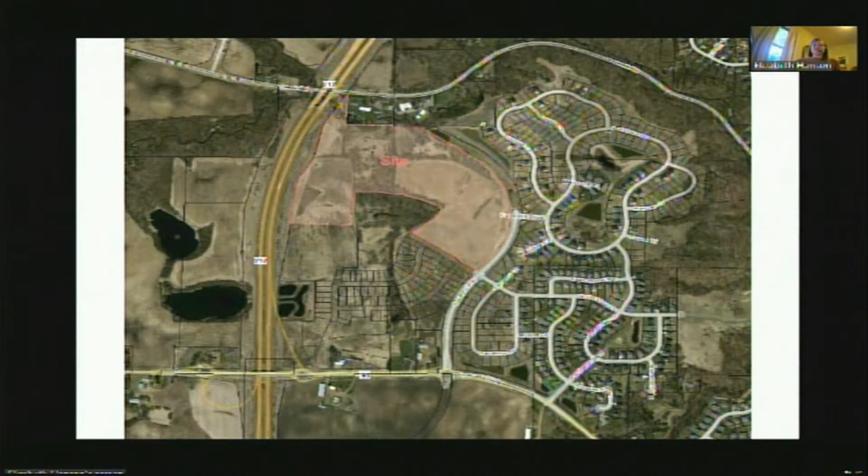In terms of background of this overall site, Harvest West, the area encompassed in blue just south of the area we're looking at tonight, was approved in March of 2018, and that encompassed roughly 125 lots. Since that time, two final plats were approved to plat out the entire area south of here. So everything south of this subject site is platted and ready for development, which includes detached single-family units, both the traditional single-family and their detached villa product by Robert Thomas Homes, also Traditions.

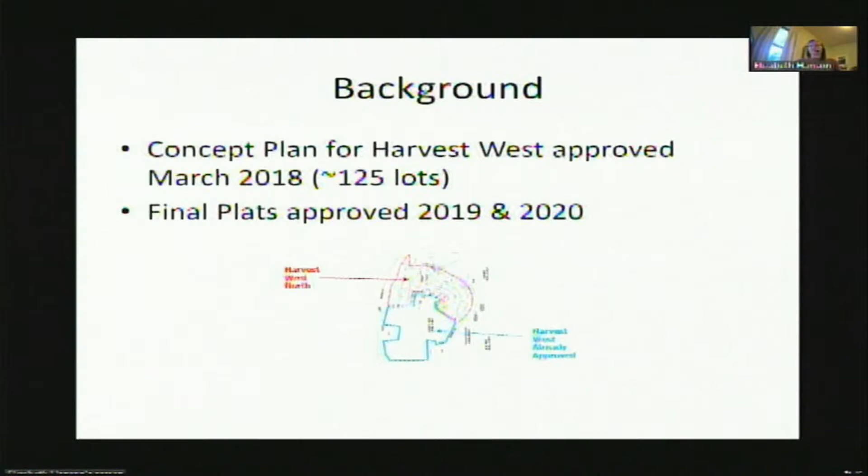Tonight we're looking at a concept plan approval for the north side of the Harvest West development. They held off on this portion to further work on some of the characteristics and conditions of this portion of the property. So they are coming back at the beginning of the process for concept plan approval, which would encompass 119 single-family lots. Of those, 85 will be for their detached single-family, traditional single-family that you see on the east side of Savanna Way, and 34 of those lots will be for their villa product, which was also proposed on the south side, a natural extension of that product. In terms of what they're proposing, it is consistent with the city's Southwest Chaska plan and our comprehensive plan for this area.

They provided a site forces exhibit to show the existing conditions out there, some of the features that make up the site uniquely compared to other ones. The site acreage we're looking at in total is about 48 acres in size, highlighted in this purple dotted line area shown here.

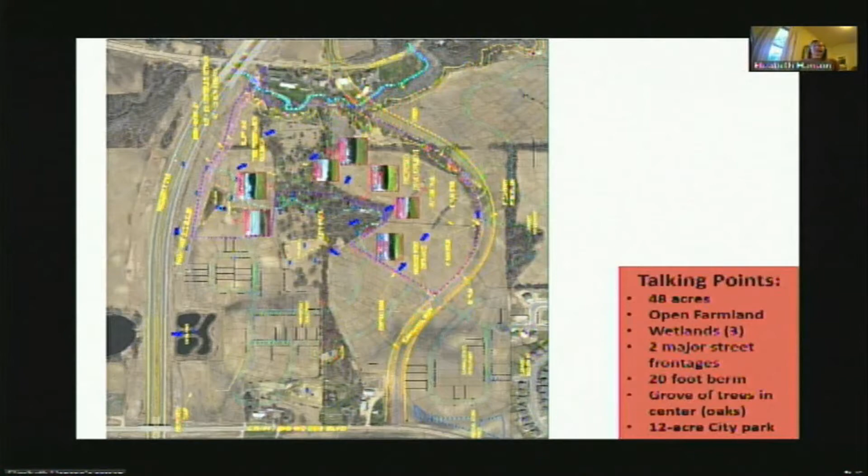This concept plan is showing a lot count of 119 lots. It can basically be broken up by the west and east sides of the site. These are not a full continuous movement around the site, and that was done intentionally to help preserve this conservation corridor in the middle, which I'll get into a little bit later.

Essentially the west side is guided for those 34 villa lots. When we say villa lots, we're talking about single-level living homes. It will be a natural extension of the other villa product just to the south here that has already been platted, so they'll be providing a natural extension and terminus to that, just to the north.

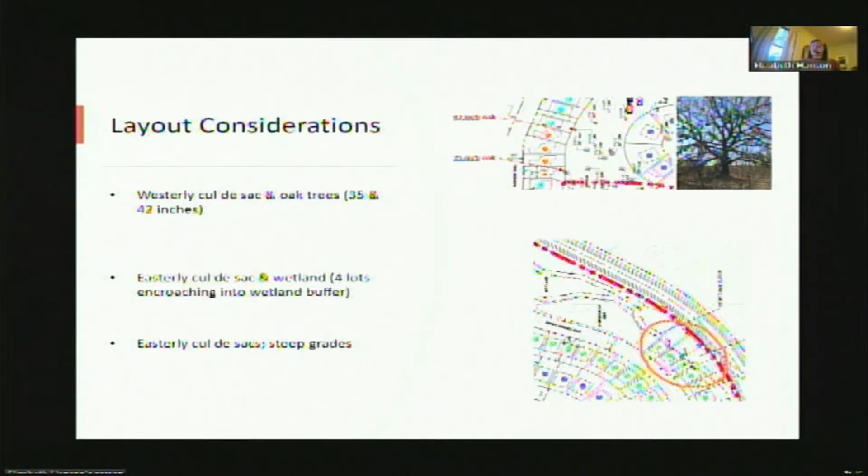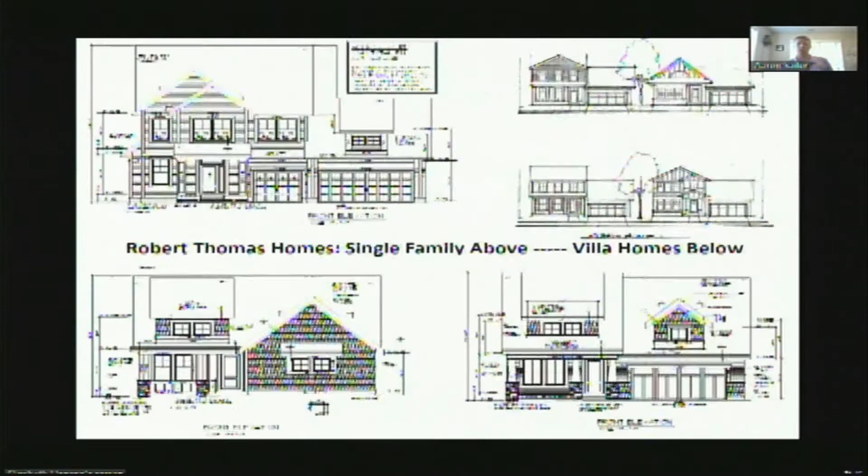In the engineer's memo, it looked like they stated there are two wetlands on site right now. Looking at the preliminary site plan, pretty much all you see are roads and rooftops, even before the driveways go in, with the exception of the conservation corridor. So I'm a little concerned about the density here and not really having yards and places for water to go. These are really tight lots. I know in the Harvest right now, all the homes are predominantly 65-foot width lots, with the exception of some unique lots on the corners. I live across County Highway 44 in Founders Ridge, and we have 75-foot minimum lots in my neighborhood, and even today I still have neighbors putting in drain tile four years after construction, just because there are drainage problems. There's a high water table, water's got nowhere to go, there's just soupy yards even with bigger yards.

So I'm concerned that could be happening over here in the Harvest as well. It looks really dense compared to the developed part of the Harvest to the east, and the other side of the county road. So I'd like to put those comments in, that if they could increase some of the lot sizes, like you laid out as possible considerations, I think that would help this site greatly.

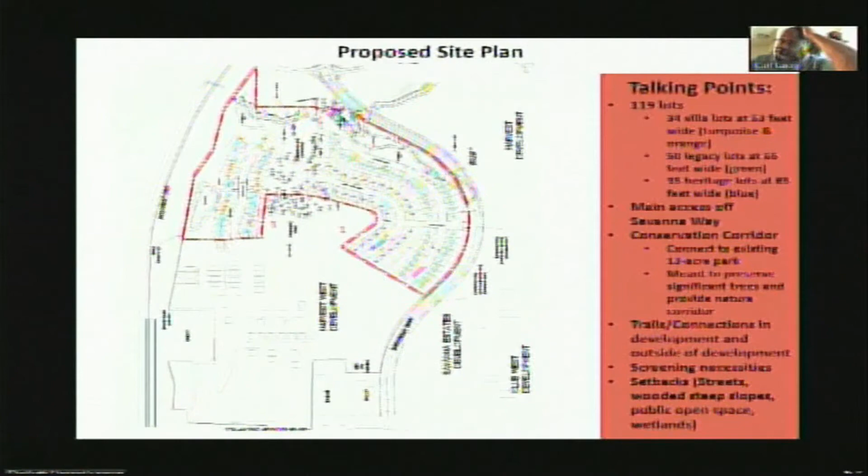If we don't have any other questions for Liz, would the developer like to make any comments before we continue on? I am not hearing anything, so I think we will move on and look for a motion to recommend the approval of the concept plan.

This is Commissioner Nelson. I'll make the motion to recommend to the City Council to approve the Harvest West North concept plan for the 119 lot subdivision on the 48-acre land in the southwest Chaska growth area, subject to the following 22 conditions. Thank you, Commissioner Urbanski, I'll second that. Any further discussion?

I would like to just make one comment. It always makes me nervous that even in the concept plan, we come up with a number of lots. I realize the concept plan isn't written in stone, but sometimes if this committee chooses to change the numbers, I think it's somewhat awkward. But that's just my viewpoint, because I don't think we have enough spots for 119 lots.

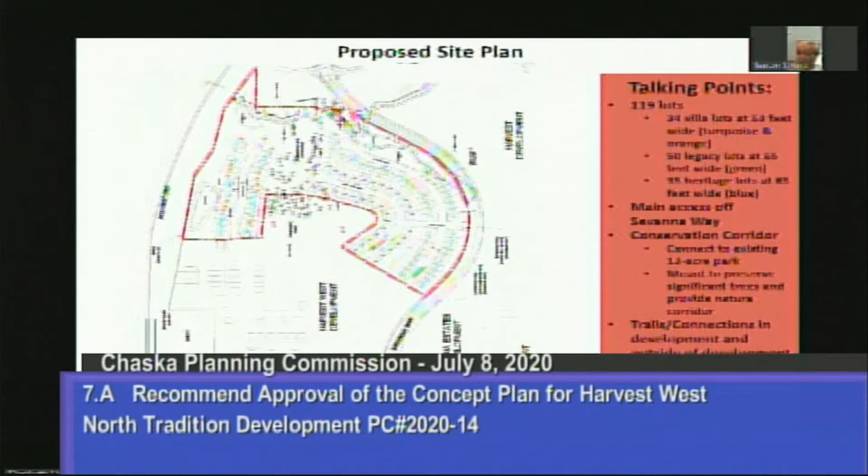Pretty tight. All right, thank you, Susan. Not hearing any other comments. Liz, would you take the roll, please?

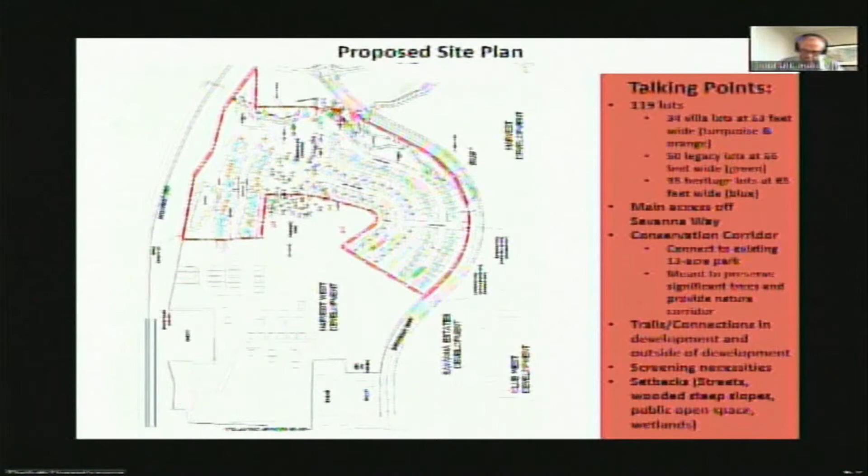Commissioner Brass, aye. Cross, aye. Lacey, aye. Olson, aye. Riley, Seiler, aye. Bovee, Urbanski, and Chairperson Delphi, aye. I show it as 9-0. All right, we have a 9-0 vote to approve the concept plan.

Thank you, everyone. Thank you, Liz, for your presentation. Let's move on to item 8 of the agenda, which is simply reading in the minutes of the June 1st and June 15th City Council meeting and the draft minutes of the June 15th EDA meeting. Those have now been read into the minutes.